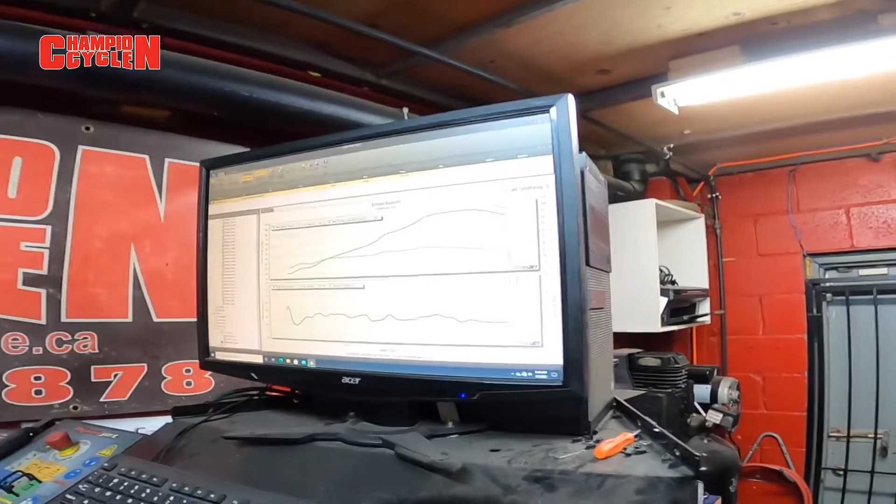Factory AFR, factory horsepower and torque. There you have it guys, that's the stock bike, 100% stock. We even went as far as to, with the body off, we made sure we fastened the air dams on just to make sure there was no nonsense about direct air going in, less the air dams, etc. That's the bike dead stock. That's the factory air fuel ratio right there. That's your factory horsepower and torque: 101.3 horsepower and torque of 44.3. This is 100% stock bike, stock as stock can be.

And you guys can see how rough the air fuel is right out of the factory. So we're gonna go ahead now and install a full performance exhaust system. Realistically, no matter what full exhaust you go, up and down a couple horse, this will give you an idea of what the difference a full exhaust will make on your bike. So stick around, let's get it done.

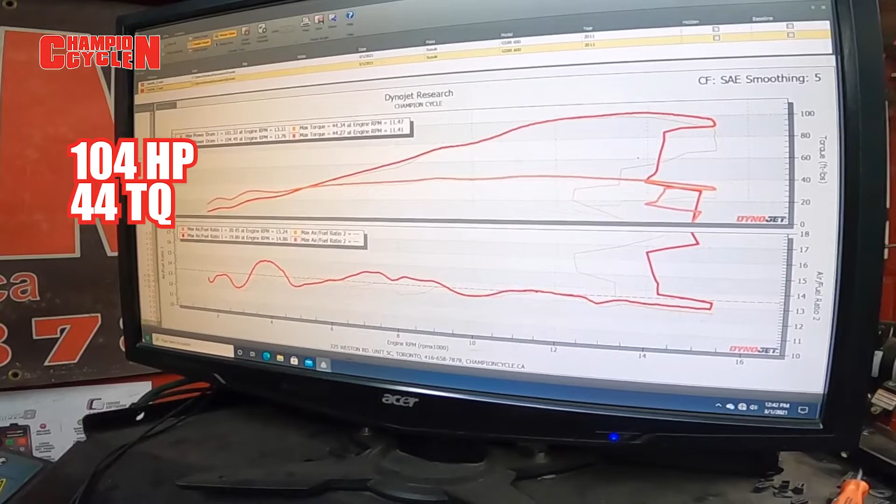So here you guys see, this is after the full exhaust install. 3 pulls right away, got our reading. As you guys can see, I highlighted the red line, which is after the full system install. As you can see here from the air fuel ratio, I'll blow this up here for you guys so you can see it a bit clearer. It's brutal. The factory one, which was this yellow one here now highlighted, was a little bit better, but still, for lack of a better word, dog poop.

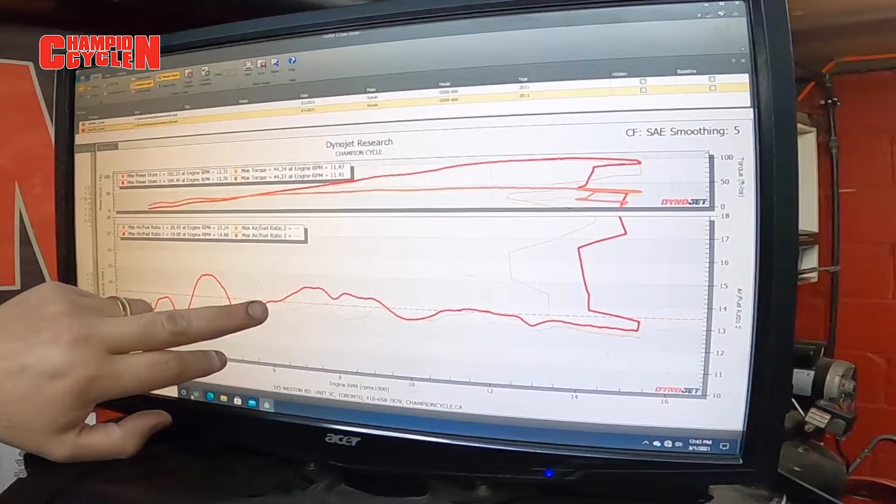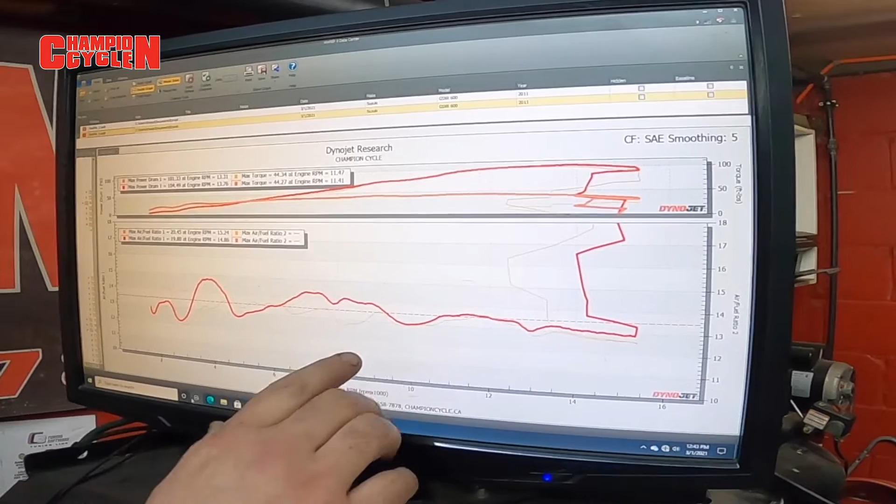As you can see, after the install it dips terribly lean down low at around 4,000 RPM, then it goes pig rich. This is the part you have to be concerned about when installing a full exhaust and not dyno tuning your bike. At 6,300 RPM about, it dips dangerously lean, and around 7,000, 7,500, 77, 8, 82, 85, it's lean all the way to 9 grand. That's the area, your mid-range, where you are most of the time, and that's where it's lean, so obviously that's not a good thing. Then at 10 grand it goes rich again, then it goes pretty decent, and then again here it's a little bit rich for the end.

So we're gonna go ahead now and actually dyno tune this bike. We're gonna show you the same screen and you'll get to see the difference it makes: full stock exhaust, full system no tune, and now you're gonna see the difference it makes having your bike tuned.

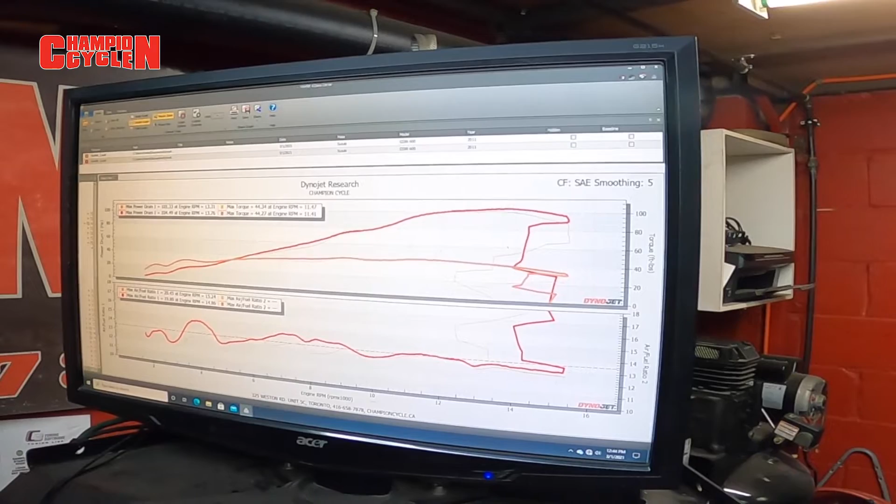And again guys, when I'm referring to tunes, I'm not referring to sending your ECU out to God knows where to have some kid on a computer send you some preloaded map. That flash tuning is not tuning, it's just flashing. It's like putting in a guess map and hoping it works out. You have a better chance of playing the lottery and winning. This way you're gonna see the actual tune difference.

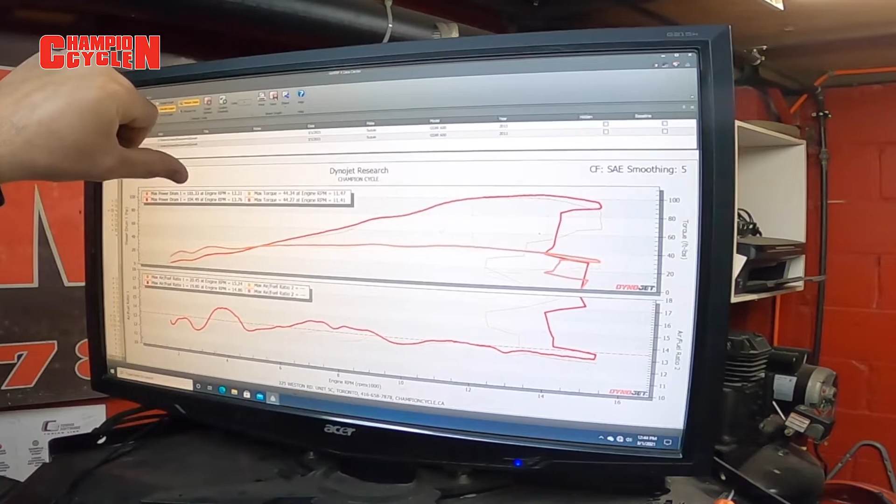As you guys can see, from stock to full exhaust, the torque stayed the same, 44.3. It actually lost a bit of torque, but more or less the same, 44. Horsepower went from 101 stock to 104 with the full system. So it did pick up 3 horsepower on the full system.

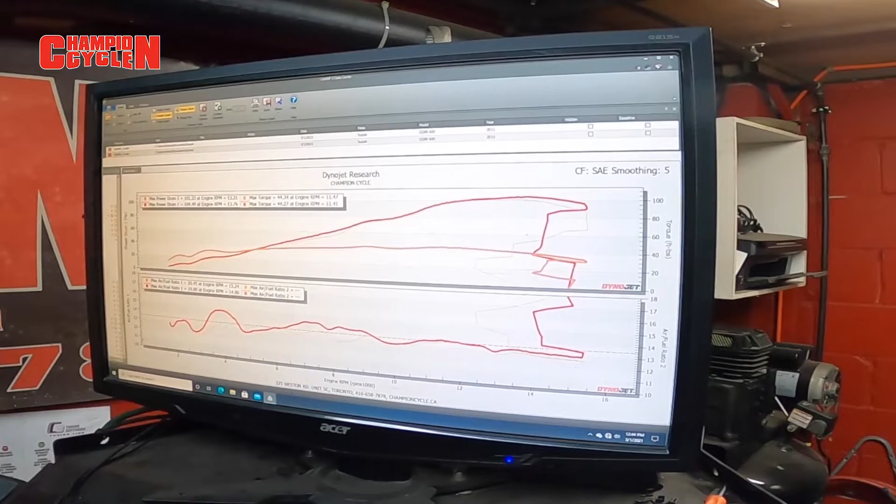Mind you guys, the only reason it picked up horsepower is because in this mid-range area here it went terribly lean. You've heard the saying, lean is mean, so lean will show numbers on the dyno, which is more than likely the reason that number went up. And again, it's leaner even at the end with the full system than it was stock, which also would add to the increase in numbers.

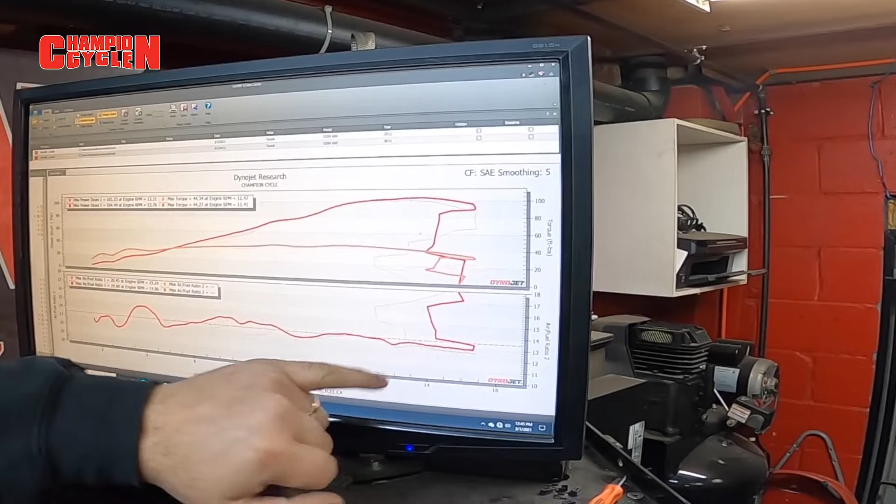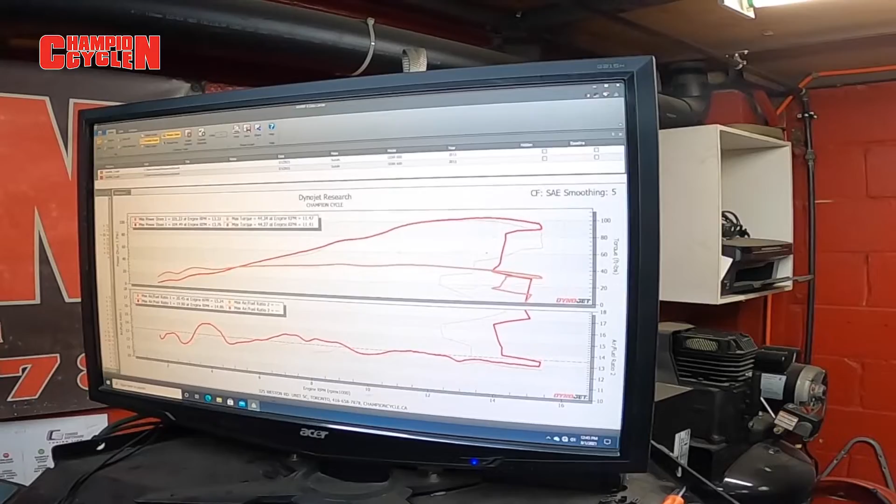So we'll go ahead and do a full tune now, guys. We're not going to record the whole thing because that doesn't make sense, but we'll throw a couple tidbits of recordings in there for you, and I'll give you guys an explanation after that's done.

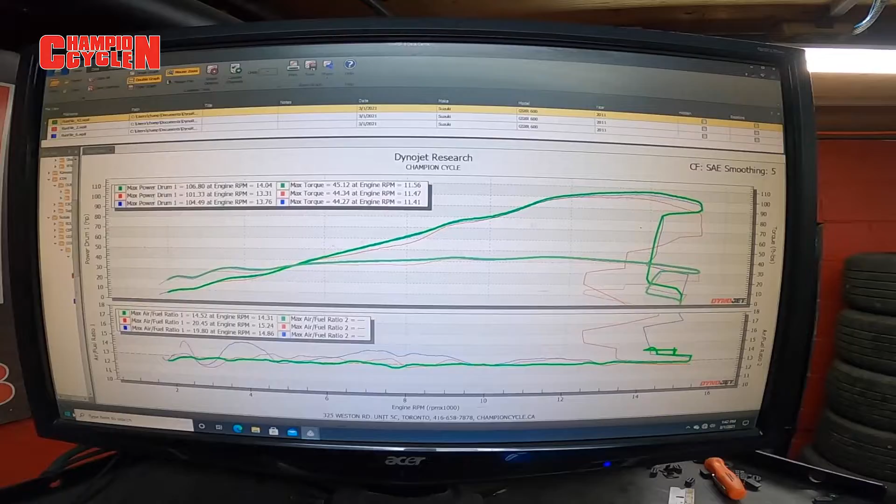There you have it, guys. So this is pretty much tuned after a full system install. In this case we're tuning with the Power Commander, but tuning with a Bazzaz or whatever else is going to give you the same result. Any sort of tuner is going to do the same kind of thing.

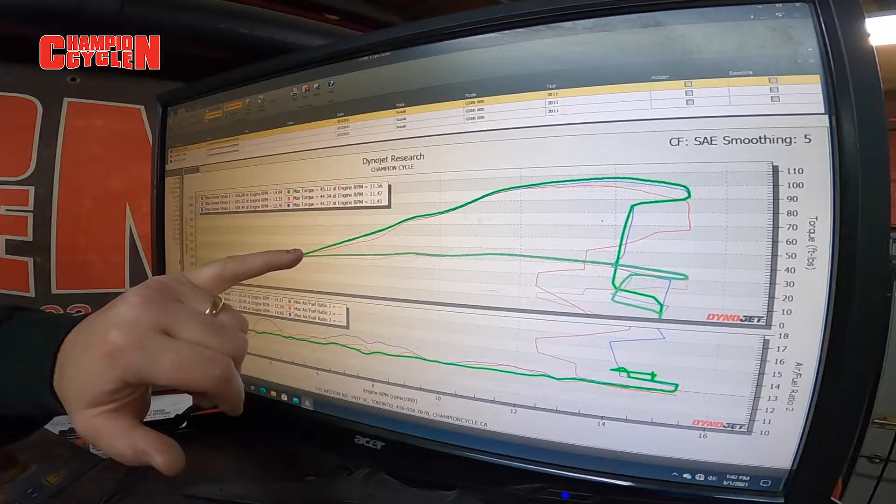As you guys can see by the overlay here, the green is the after. You can see the down low gains, the mid-range gains are phenomenal, and then the top end gains are just, like, the top end gains make all the difference right there.

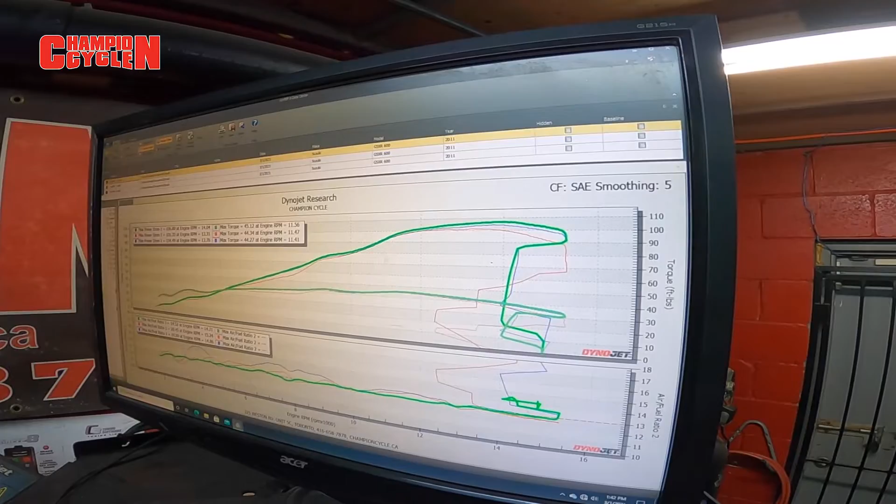Keep in mind guys, this is a race bike and it's running a stickier tire, which we did do tuning on, and as you can see up here it ended up being 42 full pulls before it was done. Obviously the tire is hot as all hell and it's causing a lot of load on the dyno. So what happens when the tire is super sticky, it causes drag, it drags down on the tire, and it kind of brings the numbers down.

But this gives you more or less the idea, right? So you guys can see the green air fuel is pretty much where you want it to be. Again, it's a race bike, so we tune it a bit richer than you would a street bike, so the numbers will look a lot lower. But nobody cares about the numbers when they're on the track and they're honking, because the dyno numbers aren't what's really going to happen when you're racing.

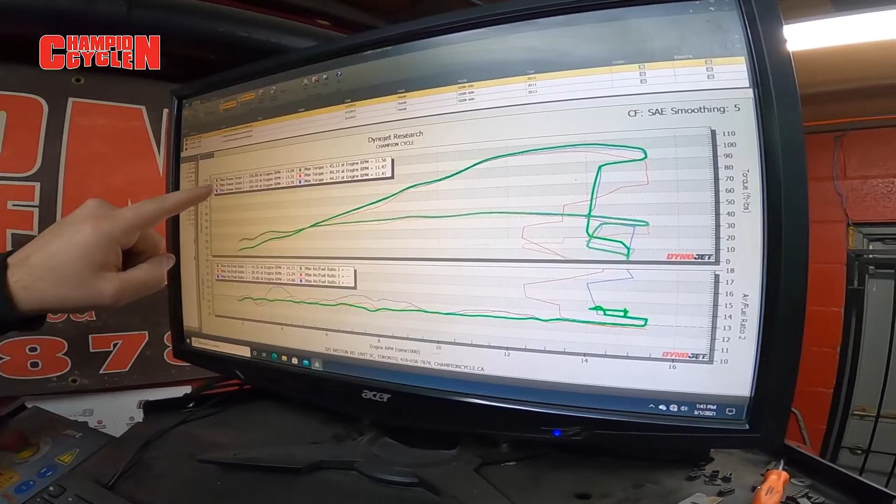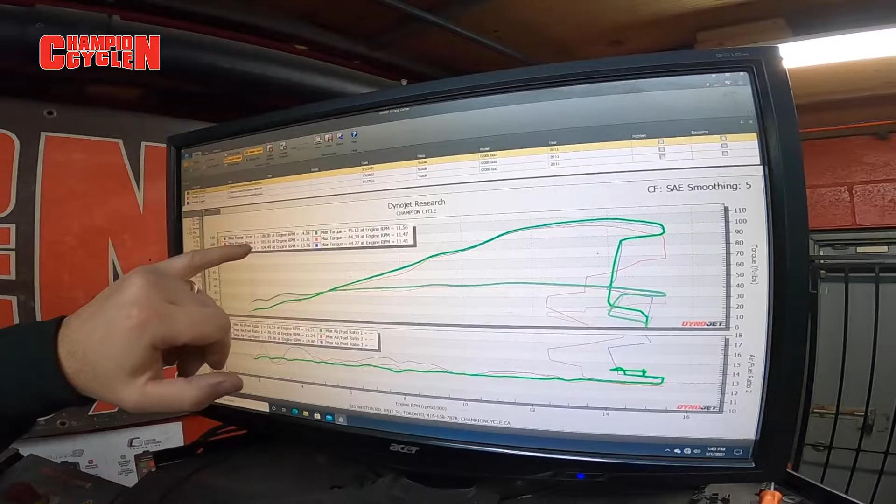As you guys can see, the before stock was 101 horsepower, full system 104, and then tuned 106. You can see the torque: 44, 44, and then 45. Not crazy gains, as you can see, but gains nonetheless, from stock 101 to 106. And obviously, like I said, this is tuned fatter for a race bike, and this is also on a stickier tire causing drag on the dyno.

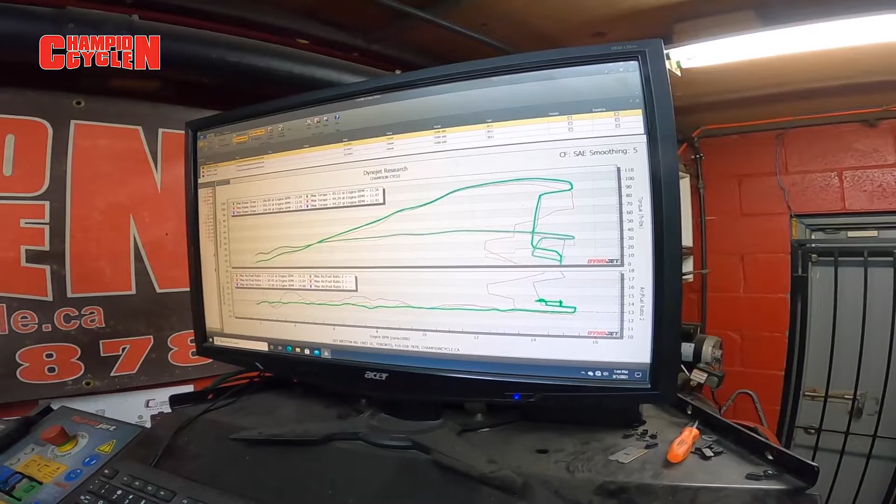Ultimately, you see on average about a 10 horsepower gain, give or take, from more or less any install. But that's about it, guys.

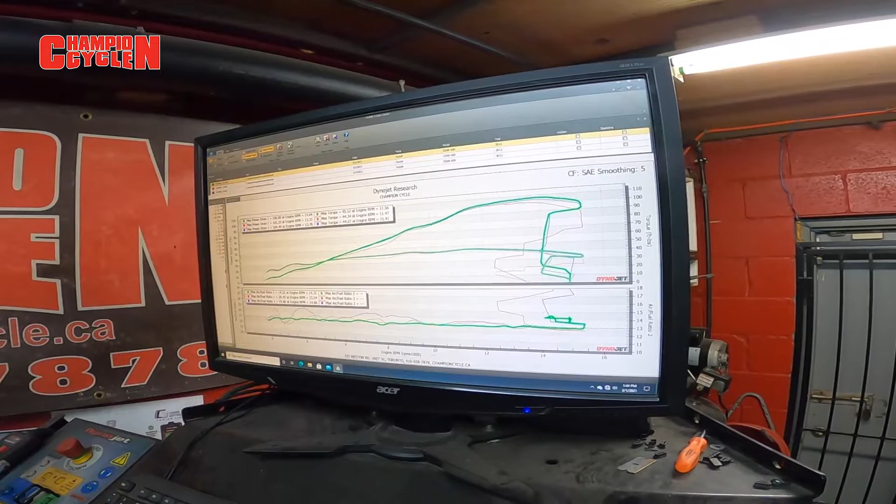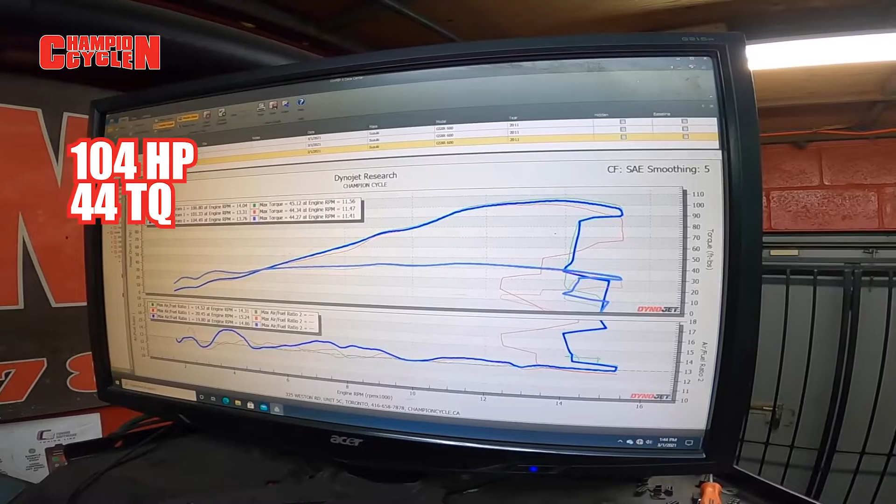You guys can see the difference from a stock bike, highlighted in red: horsepower, torque, air fuel. Full system, same deal: horsepower, torque, air fuel. Dyno tuned, full system installed: air fuel, horsepower, torque. There you have it, guys. That was the video showing the before, the middle, and the after.

We hope you guys liked the video. We tried our best to give you a pretty educated explanation without getting too into things and just rambling on. This gives you a good idea of the differences made when you install a full system without tuning versus when you do tune it versus what a stock bike comes like from the factory, which you might think has a good air fuel, but guys are riding around not understanding that their bike isn't running great just because it's stock. That doesn't mean it's perfect. Think about it guys, they produce these ECUs by the thousands and they all have the same map. Granted there's a few different maps for Europe, North America, Asia, etc., but they're more or less the same computer programs, the same maps that aren't exact for where you live, your air level, whether you're at sea level, your air pressure, and all the rest of that jazz that goes into making up the perfect air fuel mixture for your motorcycle. Hope you guys enjoyed this video.